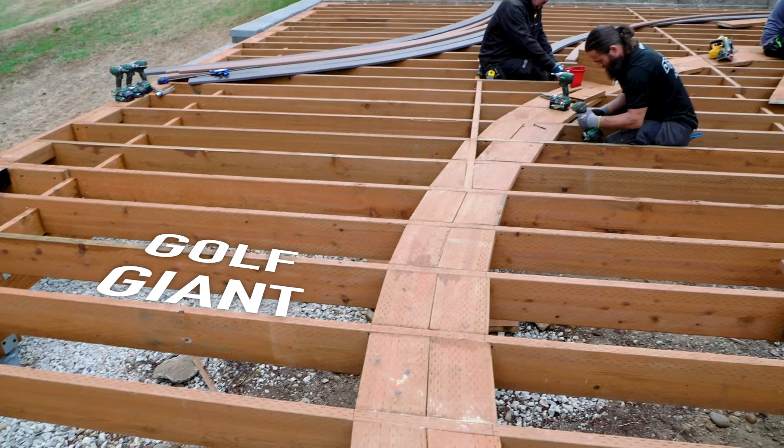So far, we've got most of this lower deck framed. We started off by installing some helical piles in the ground. They're all about 6 foot deep, you can kind of see right here, and there's several of them on this project.

We were able to drive our machine down this wall on a ramp. We used some 3.5 by 11.5 inch glulams that we were able to drive our machine on. It's pretty heavy, about 3,500 pounds.

We drove all the piles in the ground, got them all to the right pressure and the right depth, and then we were able to start building. This deck is built on a 4x8 beam and 2x8 joist.

We had to lower the deck a little bit because there's an association. Not only did we get a building permit for this deck, but there's also a homeowners association that we had to appease, and they didn't like the proposed height of our deck, so we had to lower it, which meant we had to kind of scrunch our framing materials together and bring our posts in to accommodate the beam span.

So basically what we're building right now, we're working on this section of the deck. There's a big swim spa that's going to be delivered right where we're standing. The concrete's going to be poured next week.

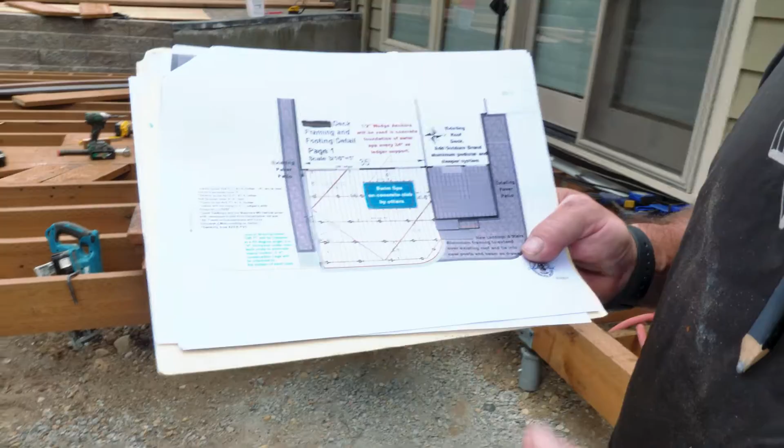So anyway, also one other thing, because we lowered the level of the deck, you see these right here? These are like anti-sway braces for the deck, for lateral movement. They're no longer required because the deck's so low to the ground.

We're up against a retaining wall over here, we're up against a house over here, a wall. So I doubt the deck's gonna move a whole lot. Even the building inspector said, you know what, if this deck moves, we got bigger problems than the deck moving. So he was cool with us not putting these in.

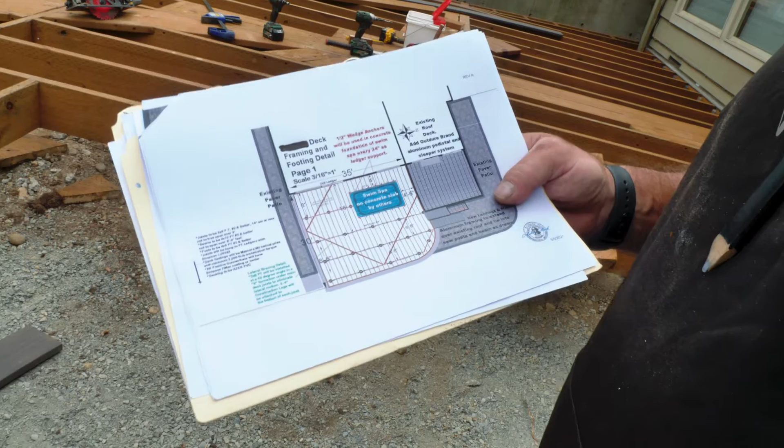I also had to change things up because we had a concrete slab in here and it was too tall and we had to lower it. So that's all gone, and now they're gonna pour a new lower slab, and I was no longer able to attach to the existing slab.

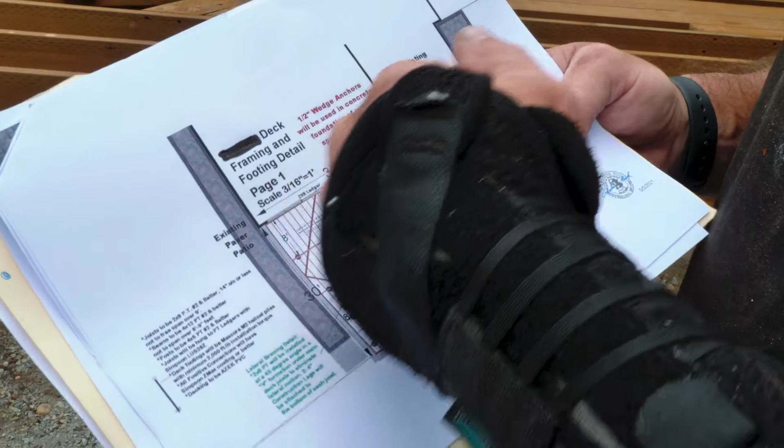So I had to add a beam here, and I had to shift these beams over. This beam had to be moved closer to the tub, which is this one right here.

Okay, so now everything is looking good, feeling good. Everything's 14 inches or less on center.

I like to span my joists a little bit tighter than normal. Average is 16 inches, but we always bring them in a little bit, just so that I like to be able to get my nail guns into places, but I also want to bring it in a little bit for the span, and so that I can make things a little bit stiffer.

Okay, so over here, this side of the swim spa is where all the pumps and the controls are, where you need to get in to access the pumps, and if you ever have to replace something.

So we are gonna make this piece of framing removable right here, and we're gonna make an access panel so that you can get in and have a little bit more room.

Most of these spa companies are like, yeah man, we need 3 feet all the way around the tub for access. I'm like, yeah, you're kidding, right? We give them 16 inches of access. I've never seen a technician complain about that.

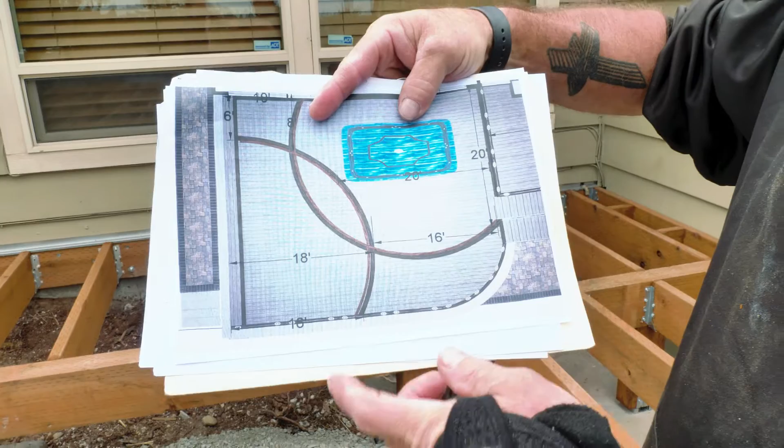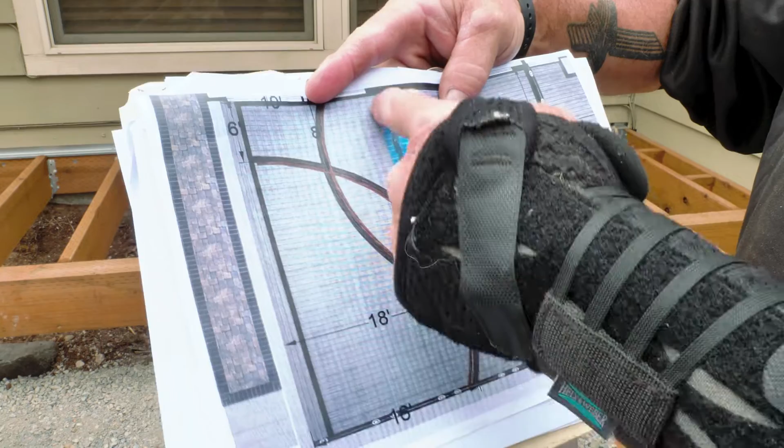Right now the guys are adding a bunch of surface blocking into the deck because we have a special pattern that we're installing. We have these bent and curved boards, and we're trying to keep everything within a 20-foot reach. We have to have a way to break all the boards on the deck, so we're doing it a little more unique than what you might see in a standard break, where we could have just run a seam right down the middle and run 20s and 20s, and it would have been done, piece of cake.

But the client didn't want that. She wanted a little more artistic look. So we are putting these special patterns in the deck, and to do that we have to add all this extra blocking right through the middle of the deck, right on our pattern. Everything's been laid out on this pattern, and that's what we're doing right now. Once that's finished, we can G-tape this entire deck and then we're ready for deck boards. So that's the goal today, is to get all the blocking in as much as possible and then ready for G-tape. So that's what we're up to.

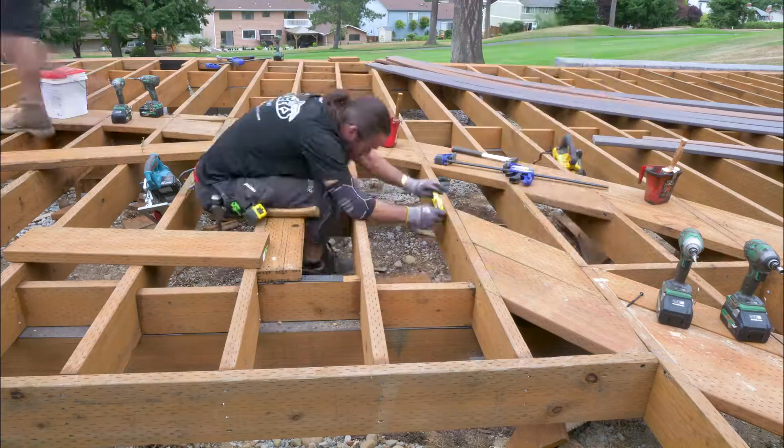What's all this blocking for? Boards behind you. They're curved surface borders instead of having straight borders on the deck. It's kind of complicated and very mind-numbing, but we're almost done with it now.

And we still have to protect it all and tape it. But it's basically all the blocking and surface blocking that we've been doing for these borders, that once we lay the decking, we cut on the curve, and then we lay these two boards together. So there's a dark hickory and a mahogany color. The dark hickory is a 5.5 inch wide board, and the mahogany is a 3.5 inch wide board. So it's like a double border in different widths.

It's kind of unique. I've never really done anything this elaborate before, but it definitely takes a lot more time than you even think or plan on doing. It always adds up. I knew that was going to happen, I knew to expect it, it just is what it is. But I was hoping by the end of today we'd have pretty much all the blocking done, and it looks like we're almost there.

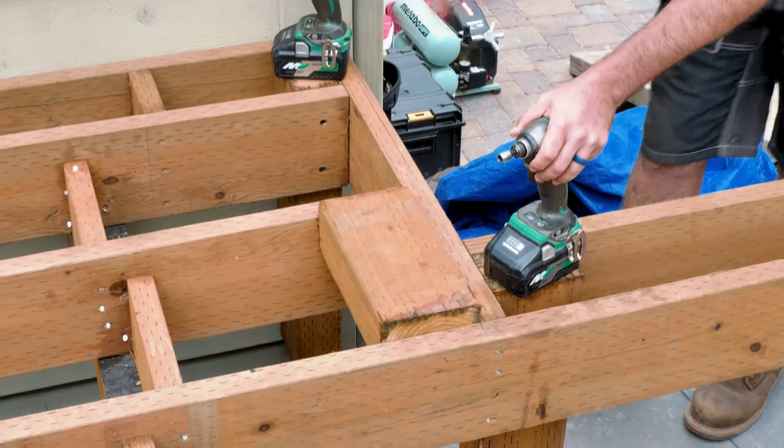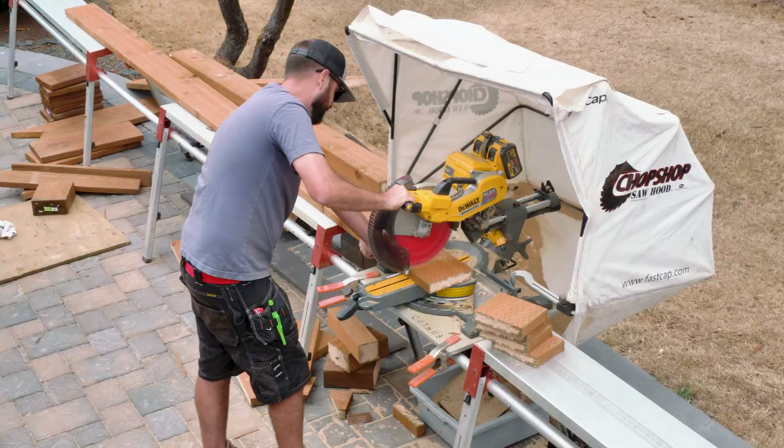Alright, so goals accomplished. We have all of our surface blocking done for all of our borders, all of our curved borders, all of our straight borders. That was a lot of blocking, about 2 days worth. Now that that's done, we can actually start putting G-tape. We're going to clean up the job site a little bit, and then we're going to start dropping down G-tape on top of the joists. So I'm really happy with the way everything turned out for this frame.

We'll be laying deck boards on it next week, and then I'll catch up with you guys towards the end of the week and give you an update on our progress. So thanks for watching, guys.